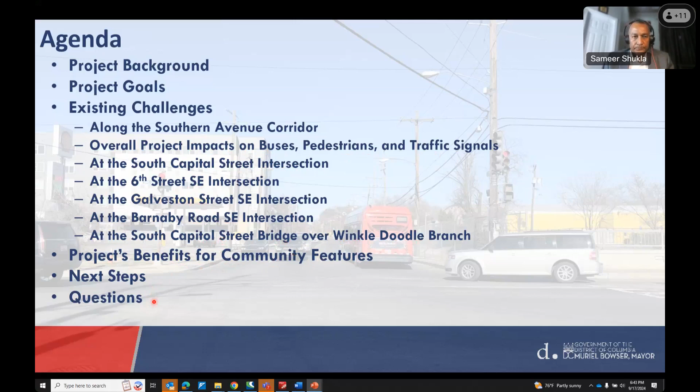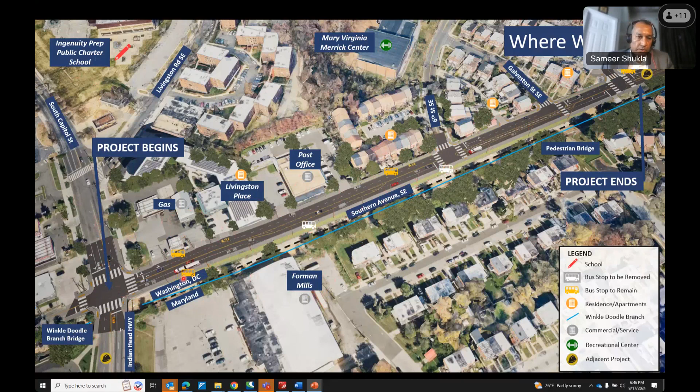The next slide, why are these updates occurring here? So this section of Southern Avenue Southeast is identified as a Tier 1 street segment in the high injury network. That means this segment of Southern Avenue has been identified as the highest priority section for safety improvements. And that comes from DDOT's DC Vision Zero Action Plan 2022 update. There were several studies done along this corridor, starting from a traffic engineering study several years ago, followed by the 2016-2021 DDOT injury and fatality crash data analysis that John just mentioned, which actually resulted in identifying this section as the highest priority for safety improvements.

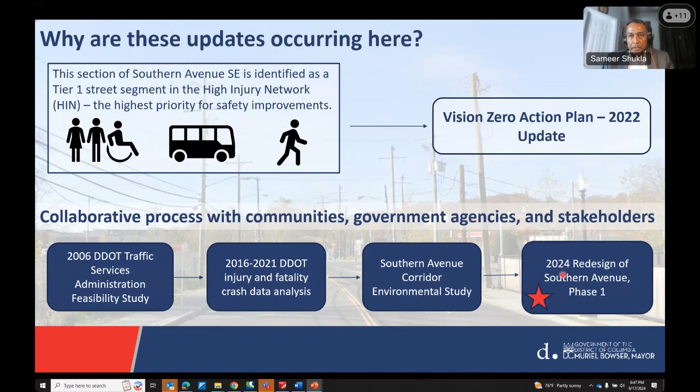We have completed the environmental study for the corridor, and here we are today talking about the final construction document development, final design development, so that we can get started with construction in the middle of next year. The goals, as John already highlighted, are to improve safety, mobility, and accessibility for all road users, including pedestrians, transit riders, transit buses, as well as vehicular traffic and drivers.

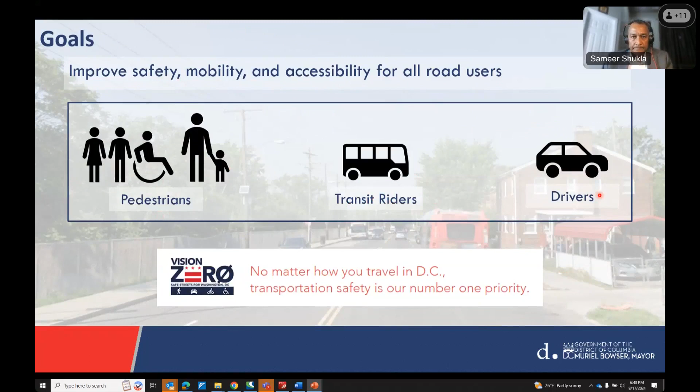And how do we achieve these goals? So in our design, we approached the mitigation measures and highlighted them in these two blue boxes here. The first approach in mitigating these concerns is to reduce the conflict between pedestrians and drivers along the corridor, and then implement traffic calming measures. In terms of reducing conflicts between pedestrians and drivers, we are proposing high visibility crosswalks at all 4 intersections. We are constructing pedestrian refuge areas at all intersections. We are eliminating right turns on red, and introducing a rectangular rapid flashing beacon, called RRFB, at the Galveston Street Southeast intersection for the pedestrian crossing.

And we are actually providing a new signalized intersection at 6th Street with the controlled pedestrian crossing. In order to achieve our goal of traffic calming, we are doing the center line hardening, and I will talk about that a little bit more in detail in the next slides.

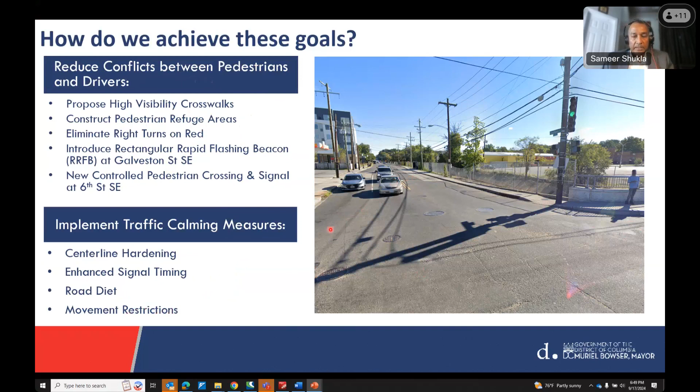Enhancing the signal timings for both intersections, South Capitol Street and 6th Street. Doing the road diet, that means eliminating the number of lanes at certain sections of the corridor to minimize or to reduce the vehicular speed along the corridor, and designing some movement restrictions for the vehicular traffic at some of the intersections.

So as I mentioned, in terms of the bigger picture for the entire project, this slide talks about the current challenges along this entire section of the Southern Avenue corridor. So we have seen vehicle and transit conflicts, as you can see on this picture, which is looking towards the roadway from South Capitol Street intersection.

There is traffic congestion and the conflicts between the buses and the vehicular traffic, unsafe pedestrian movement and crossings at all intersections, substandard sidewalks and turning radii at certain sections of the project. The one on this picture is at the corner of the bridge looking towards the Maryland side, and the deteriorated condition of the Winkle-Doodle Bridge that carries South Capitol Street at the end of the project.

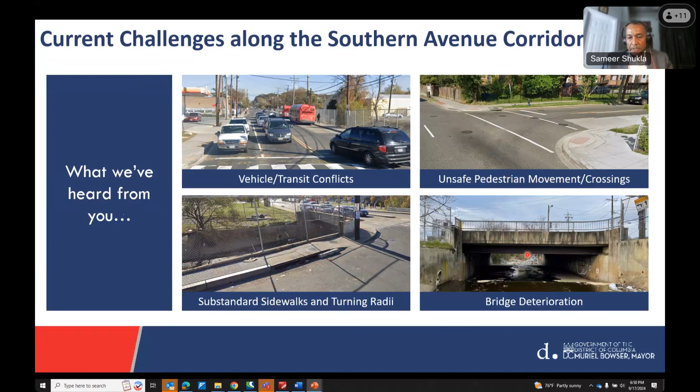Again, for the entire corridor, our approach to mitigate these concerns: for the vehicle transit conflicts, we have designed a dedicated bus dwelling area, and I will show that again during the presentation. We have reset the bus shelter at the south side of the street near the intersection. We signalized the 6th Street intersection. We introduced the left turn restriction at Galveston Street.

For the unsafe pedestrian crossing, we propose an RRFB, as I mentioned earlier, at the Galveston Street Southeast intersection. We have designed high visibility crosswalks at all intersections. We upgraded the pedestrian ramps and signals for ADA compliance. And we designed in a way to shorten the crosswalk distances by adding median refuge areas at certain intersections.

For the substandard sidewalk and turning radii, we are reconstructing the sidewalks for the entire corridor, widening the sidewalk at existing pinch points to meet the DDOT design guidelines for ADA compliance, and reconfiguring the turning radii at some of the intersections to make the vehicle movements better. And again, for the Winkle-Doodle Bridge, we are rehabilitating the bridge to extend the lifespan.

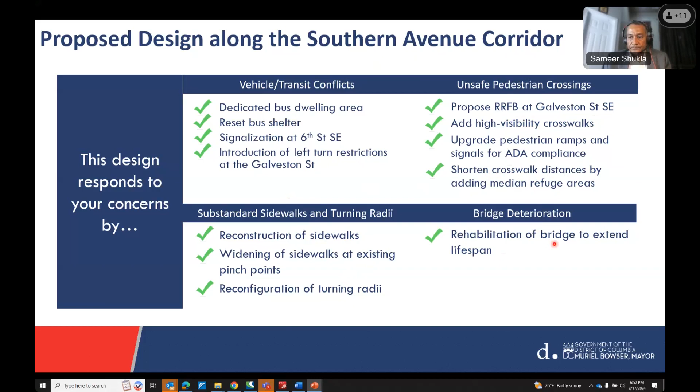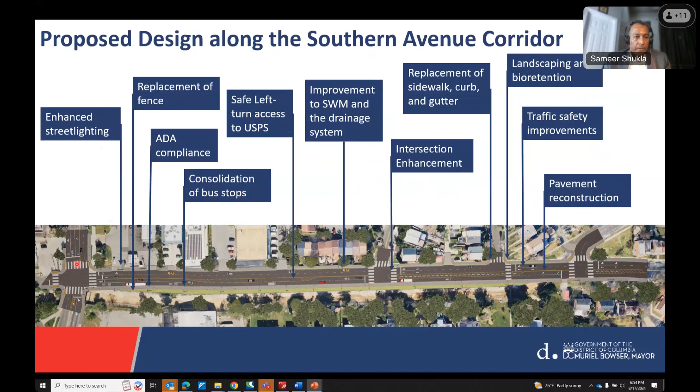We have provided new stormwater management facilities and improved the drainage system for the entire section here. Enhance the intersections. Again, I will talk more in detail when we discuss these intersections. We have enhanced the safety and the design of these intersections. We are replacing the sidewalk, curb, and gutter on either side of the roadway, providing landscaping and bioretention areas at certain sections of the corridor, improving the traffic safety for the entire corridor, and reconstructing the pavement from Barnaby to South Capitol Street.

This slide shows the lane configuration, the proposed cross sections at three major locations along this corridor. The first section is at the South Capitol Street intersection. As you can see, going from the intersection towards north, we have the bus only lane, which is the bus dwelling area, and one northbound lane. And at the intersection, the inner lane is a left turn only lane, and the outer lane is a shared through and right turn lane at the South Capitol Street intersection, adjacent to the gas station here.

The second one is median left turn access to and from the post office. In front of the post office, again, one northbound lane and the median lane to provide access to and from the post office, and then two lanes coming down south towards the South Capitol Street intersection.

And the third section shows the median hardening from Galveston Street to 6th Street. Again, there is one northbound lane, and in the middle of the roadway, what we call the median, the center line hardening, where we provided the delineators and concrete blocks. And at 6th Street, we have two lanes, two through lanes and one shared through and right lane at the 6th Street intersection.

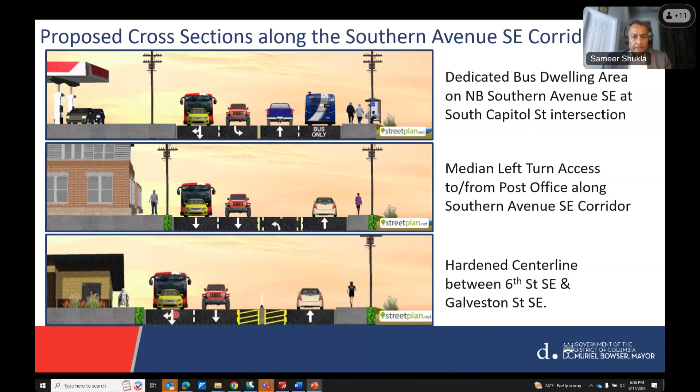In terms of the bus improvements, there is no change in bus routes. As I said, there are close to 6 routes that operate at this section, at this block of the corridor. We are keeping those as is. There is a minor shift in bus stop locations. That means the consolidation that I mentioned earlier.

We are providing the dedicated bus dwelling area along northbound Southern Avenue Southeast, close to the South Capitol Street intersection. And we are tying back this design to the already completed Southern Avenue Phase 2, close to the Barnaby Road intersection.

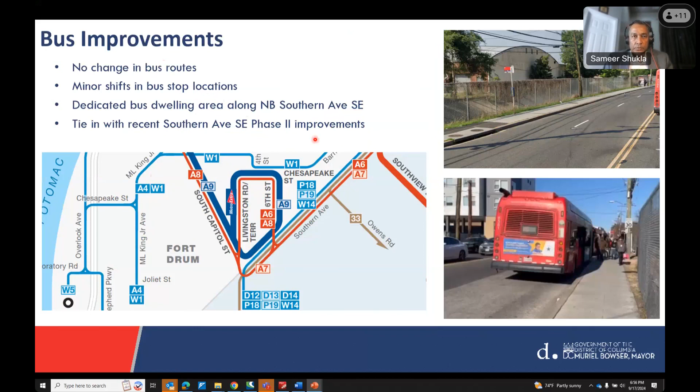Another major element of design in this project is the improvement in the existing signals, as well as proposing the new signal. The red dot here shows the existing signalized intersections, and the yellow dot is for the unsignalized intersection. Again, if we start from South Capitol Street, that is currently a signalized intersection. And then we have 6th Street here, which is an unsignalized intersection.

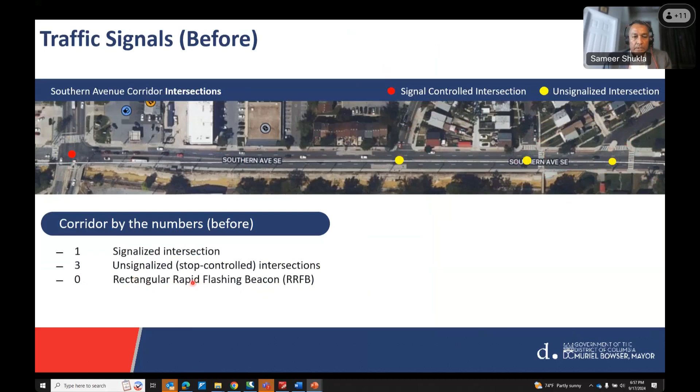Galveston Street, again unsignalized, and Barnaby Road, again an unsignalized intersection. In the existing condition, we do not have any rectangular rapid flashing beacons, RRFBs. In the final design, in the build condition, we have two signal-controlled intersections. We introduce a new signal at the 6th Street intersection over here, and of course improve the South Capitol Street intersection.

At Galveston Street, we have introduced an RRFB, rectangular rapid flashing beacon, for the pedestrian crossing. And at Barnaby Road, it's still an unsignalized intersection where it ties back to the Southern Avenue Phase 2.

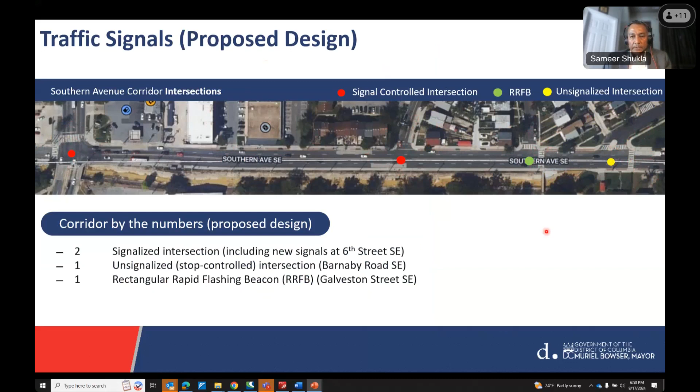Current challenges at South Capitol Street intersection. So now we talked about the corridor, and now we dwell a little bit more in detail on each of these intersections, starting with South Capitol Street. So as I mentioned earlier, constrained sidewalk space and inadequate turning radii on top of the bridge. That's one of the major concerns here.

Unsafe, non-compliant crossings. As you can see in the existing condition on the bridge, there is an unsafe crosswalk with no ADA ramps, and unsafe, confusing vehicle movement at this intersection, especially for vehicles which are coming down to the South Capitol Street intersection, trying to make a left turn on Indian Head Highway or a right turn on South Capitol Street.

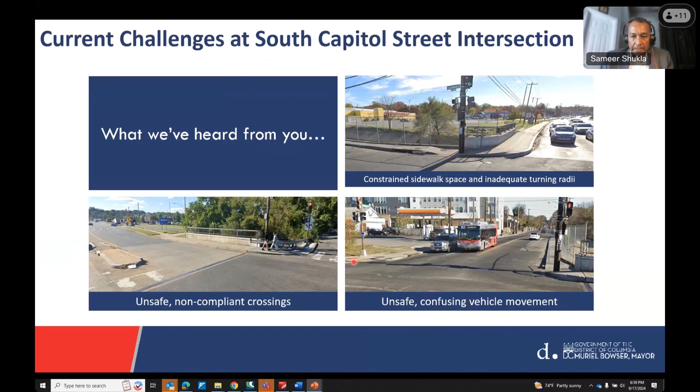So this rendering shows the proposed design. We have upgraded the traffic signal system at this intersection. We have provided lead pedestrian intervals for the pedestrians at all legs of this intersection. Upgraded the crosswalk to show high visibility markings at all 4 legs of the intersection. We have widened the sidewalk at the pinch areas.

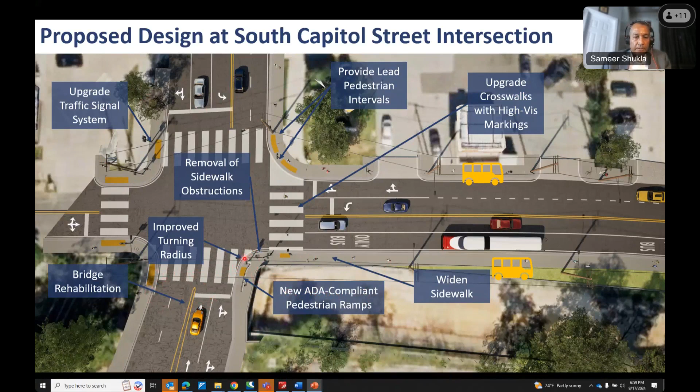Another major element is to provide the ADA compliant pedestrian ramp on the bridge at the intersection across the Indian Head Highway. And then we are rehabilitating the bridge here, and have also improved the turning radii at this pinch point, at this pinch corner of the intersection.

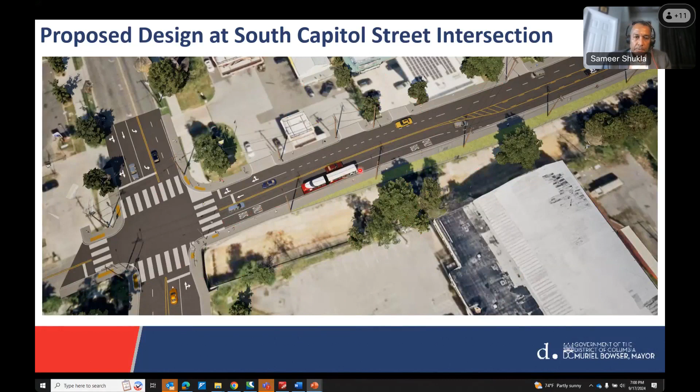This is a bird's eye view again of the same configuration that I talked about in the previous slide, that shows how the entire area is going to look, along with some of the neighboring houses and the department store. And as you can see, this is the proposed bus dwelling area here close to the intersection.

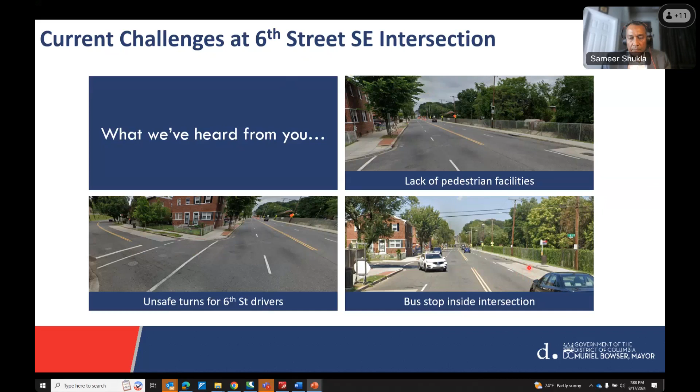In our proposed design, as you can see, we have first of all provided the new traffic signal system at this 6th Street intersection. We have upgraded the crosswalk with high visibility pavement marking, and hardened the center line, as I mentioned earlier, all the way from 6th Street to Galveston Street.

We have provided the new pedestrian refuge area at this intersection here, provided new ADA compliant pedestrian ramps, and a new pedestrian crossing on the south side of the intersection. And with this new traffic signal, we provided lead pedestrian intervals for the safer crossing of pedestrians.

This white bus shows the existing bus stop, which is within this intersection in this area, and has been relocated to the bus dwelling area near the South Capitol Street intersection.

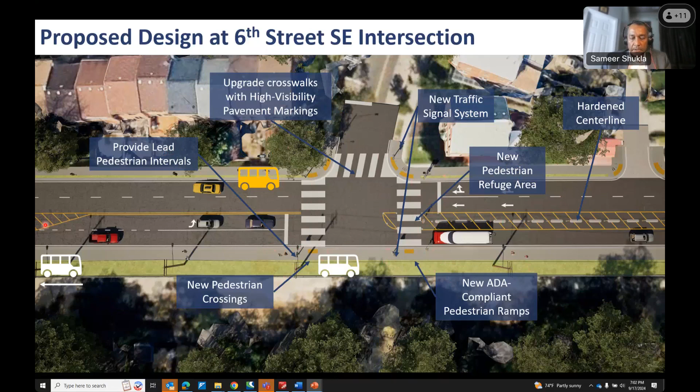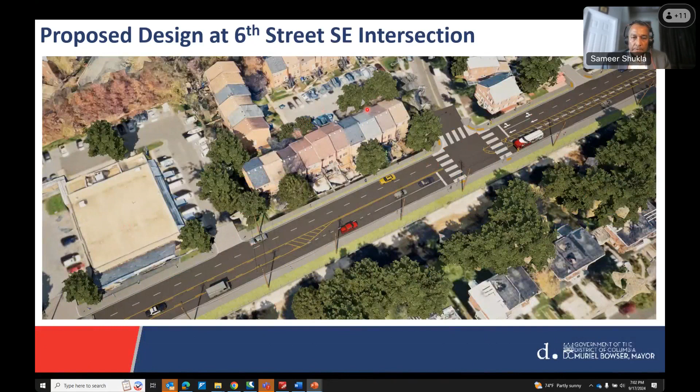And this again is a bird's eye view of the final design elements at the 6th Street intersection here, with some of the post office, surrounding houses, and some part of Maryland.

The next intersection is the Galveston Street Southeast intersection. Again, we have seen unsafe movement for Galveston Street drivers here, uncontrolled crossing for the pedestrians across South Capitol Street as well as Galveston, and retaining wall degradation.

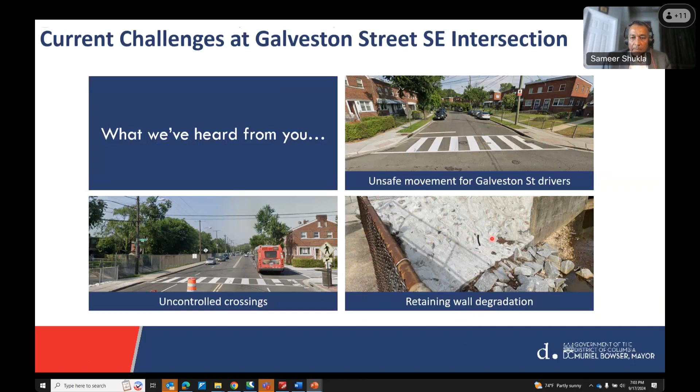This retaining wall that we have here in this slide, there's a pedestrian bridge that I mentioned that connects the Maryland community, folks living in Maryland, to the South Capitol Street, Southern Avenue corridor. And this pedestrian bridge has a retaining wall there, which is a safety hazard, not just for the pedestrians who are using the bridge, but also for the pedestrians who are on sidewalks. So we are rehabilitating this retaining wall also as part of this project.

In terms of the improvement, we have provided the new RRFB signal system here at this intersection. Restricted the Galveston Street movement to right in, right out by providing the median centerline hardening here, created the new refuge area for pedestrians, provided the new high visibility crosswalk marking. And as I mentioned earlier, we are rehabilitating this retaining wall here. As you can see on this image, that's the pedestrian bridge that connects folks from Maryland to the South Capitol Southern Avenue corridor.

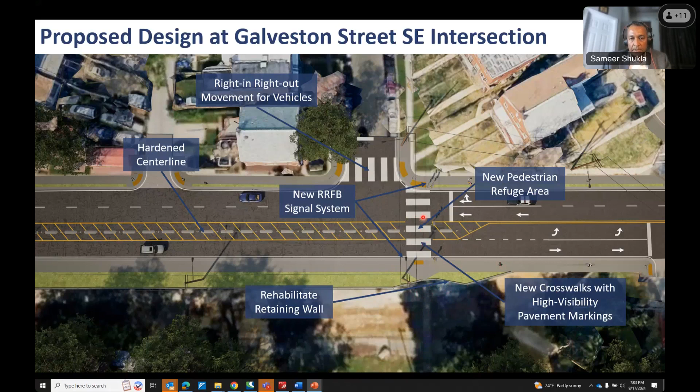And again, that's a bird's eye view of the final configuration here at Galveston Street. This is 6th Street. That's the centerline hardening, and that's the pedestrian bridge and improvement to the retaining wall at this corner over here.

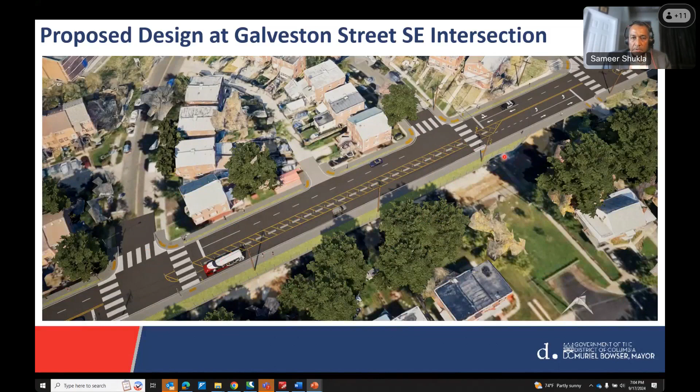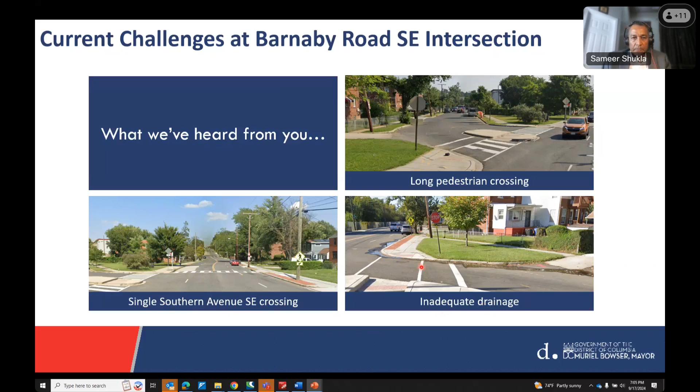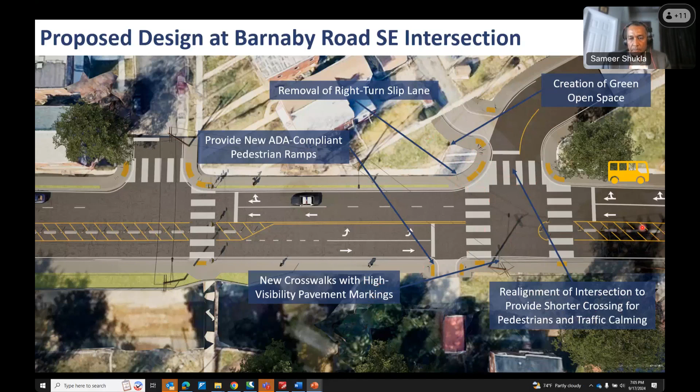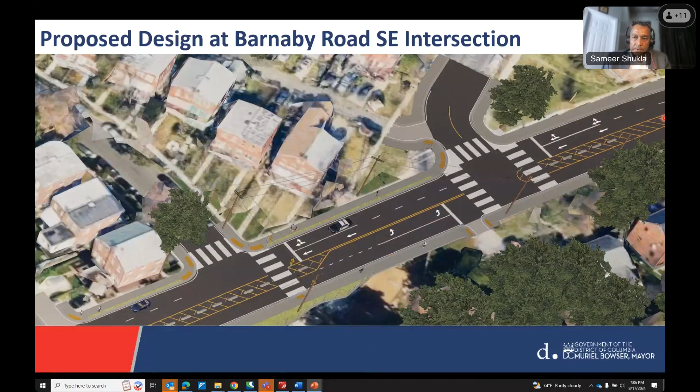And then we tie back to Southern Avenue Phase 2 here at this intersection, which Phase 2 is already almost completed now. And that's again a bird's eye view where it shows the improvement to the intersection and how it goes and ties back north of this intersection to Southern Avenue Phase 2, a little bit beyond my screen over here.

Another major element, as I mentioned, we have this Winkle-Doodle Bridge that carries South Capitol Street over Winkle-Doodle Branch. So as part of the rehabilitation to extend the lifespan, we are doing the abutment face reconstruction. We are doing the deck joint elimination and reconstruction on top of the bridge, and we are milling and overlaying the deck at this area.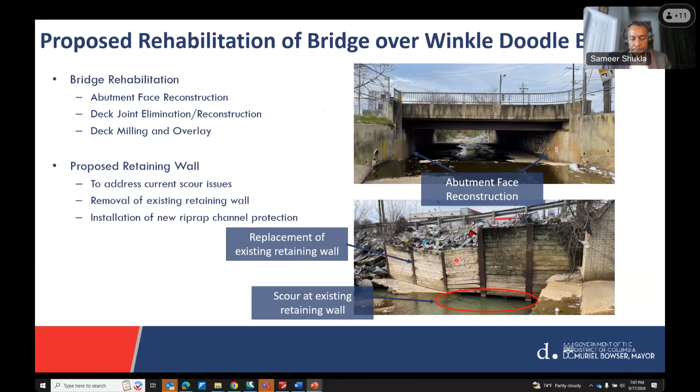Similarly, this is the retaining wall at the DC side downstream of the bridge, and to address the current scour issues, we are removing the existing retaining wall and putting the new retaining wall over there, installing the new riprap for the channel protection in this area. And this slide shows a little artist's rendering of how the rehabilitation will look in this area with the retaining wall and the slope protection downstream of the bridge.

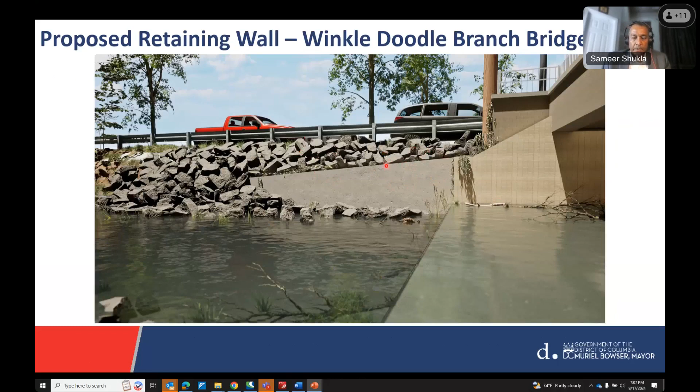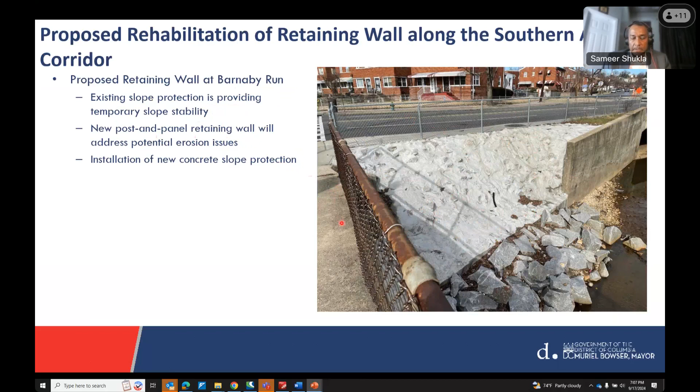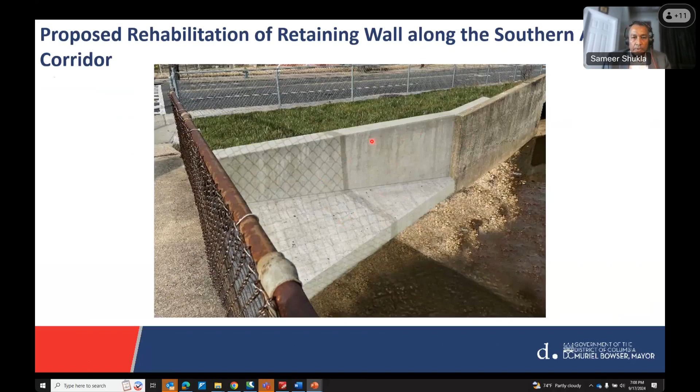And this is another rendering that would show the rehabilitated retaining wall and the slope protection in this area over here. So that was the discussion on major design elements in the project.

Now, in terms of the next steps, of course, we will open the floor for Q&A. As far as the timeline is concerned, the preliminary design was completed last year in 2023, and we are trying to complete the 100% design construction documents by the fall of this year, in the next few months, with an aim to start construction in early summer 2025, followed by full construction by summer of 2026. So that's a little timeline of the project.

And another quick note: of course, we'll take questions now during this meeting. At the same time, if there are any questions, the public can submit the questions to this email address, nick.blom@aecom. Nick Blom is a civil engineer with AECOM, and we request the public to submit all their questions before October 1st, 2024.

And with that, I will hand it over back to Daria to take public questions.